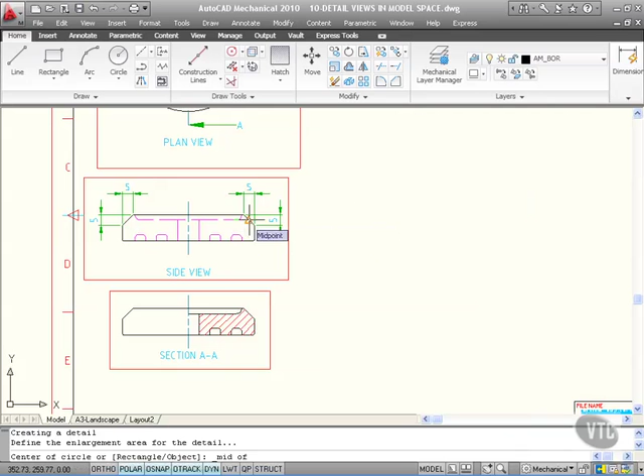Now, as I come out, that circle that I place is actually going to cross some of the dimensioning I've got in place already. So I'll just bring that in, make sure it encompasses all of the area that you want to show as the detail. And I'm going to specify by absolute scale there and make my detail 2.5 times its original size. I'm going to have the view name A, and I'm going to have an annotation leader coming off of the actual base view. I'm going to detail that in the current space and OK it right there.

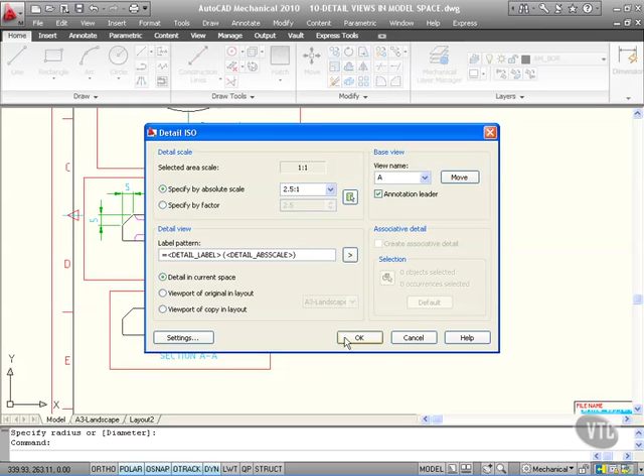So there's my circle, and as I come out now, look, I can place my circle just there, place the detail view, and there it is. Now the text has been automatically placed above it, and it shows it as view A, 2.5 to 1 as the ratio. I can click on that text, click on that grip, and just drop it just there underneath the view and hit escape to deselect.

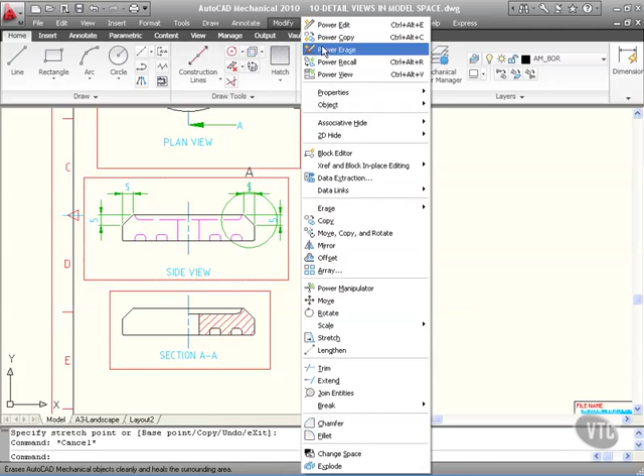Now the problem I have there is those dimensions now are clashing with my detail circle and my little annotation line coming out to the A there. So what I'll do, I'll go to Modify and Power Erase. So I'll select that 5 dimension there and that one there, right click to confirm. Now I used Power Erase because that deletes the AutoCAD Mechanical intelligent objects, not just the standard AutoCAD objects. But look how much clearer that detail base view is now.

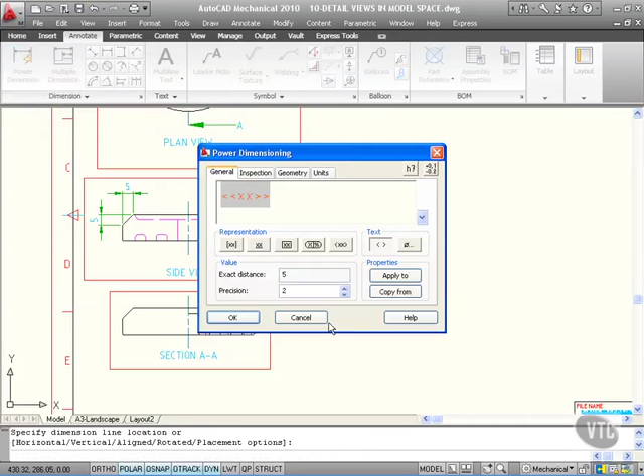And then what I would do is I would go to the Annotate tab here, and then I would power dimension from, let's say, here to here, and click. There's my 5 there. I'm just going to click on OK there. We'll look at annotation later on. And then I'll come in here, click and drag that way. And there's my 5 there. And then it's just an enter and then escape to finish. So you can see there that I've taken those dimensions from there so that they're not clashing with the base view of my detail view.

I can do the same there with the sectional view. I'll just pan upwards a tiny bit there. Same process, but let's look at placing a rectangle this time. So it's back to the Home tab, Draw Tools panel, and Detail View. What I'll do now though, instead of center of circle, I'll right click and select rectangle there on the shortcut menu. First point of my rectangle is going to be there, click, drag it around the area I want to detail, click. Same process, specify by absolute scale.

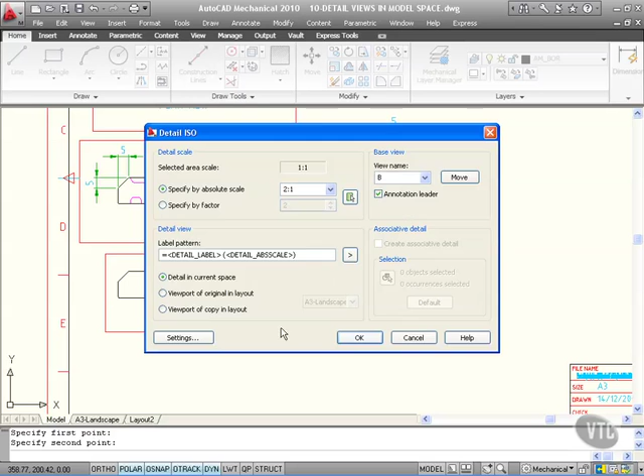I'm going to stick with 2 to 1 this time, but look, it's picked up the fact that I've already got a view name of A and immediately gone to view name B. I'll have an annotation leader again, like I did with the circular base view. I'll detail in the current space and OK that. There's my view there. I'll drop it in just underneath A there. Notice the text looks a bit screwy, no problem. Click on it, click on the grip, just drop it underneath the view there and hit escape to deselect.

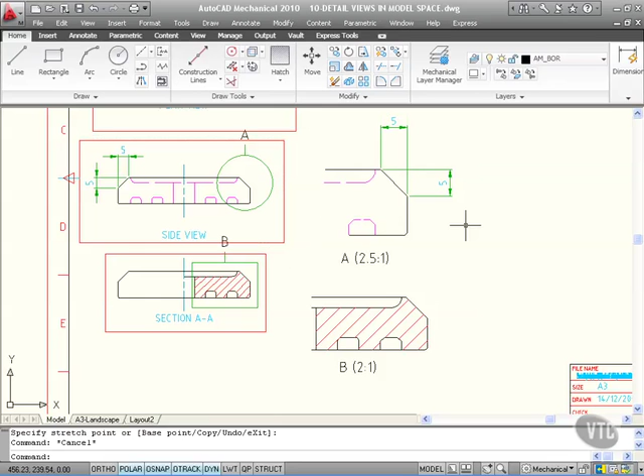There's the B there. Now you'll notice that these scale areas have got those red boxes around them. Now the good thing is those will not appear in my plot preview. Let's just prove that quickly. I'll right click on the model tab there and go to plot. I'm just going to set this up as a DWG to PDF quickly, like so. I'll make sure it's on a full bleed ISO A3, which is the sheet size, so 420 by 297.

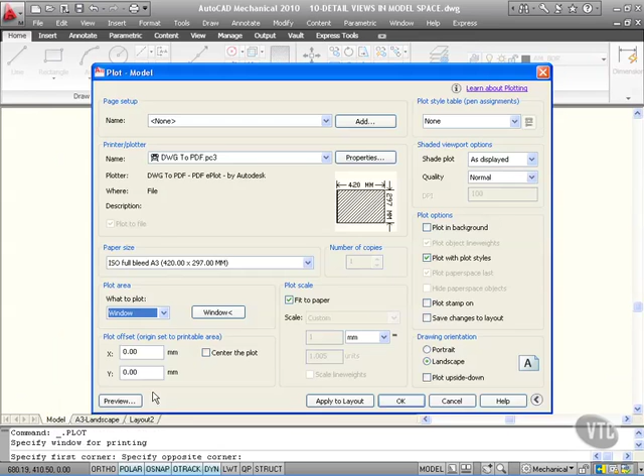What to plot? I'll go to window there and I'll zoom out. So I'm going from that corner of my drawing sheet in the model space to that corner of my drawing sheet. I'll just do a quick preview of that and you'll notice that none of those scale area lines actually show up. That's because they're switched off automatically in the mechanical layers. So if I just right click and exit there and come out and cancel that plot command, let's click on one of those, right click and go to object properties. What layer is it? It's actually the layer AM views. You can see that in the properties palette.

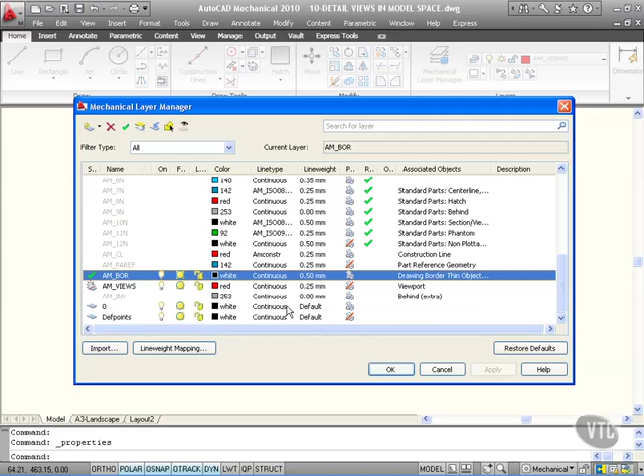If I close the properties palette and go to the Mechanical Layer Manager, you'll see there, if I scroll down, AM Views there, can you see it's got a red line through it saying that it doesn't plot? As you can see there, non-plotted, so it only shows it in the drawing. It doesn't actually plot it. So I'll cancel that there for now. So the good thing is those scale areas and any viewports from those scale areas will not plot. So that's how you create your detail views in your model space, like so. And also, I've just quickly shown you there that those scale areas do not plot. That also applies in your layout tabs as well.